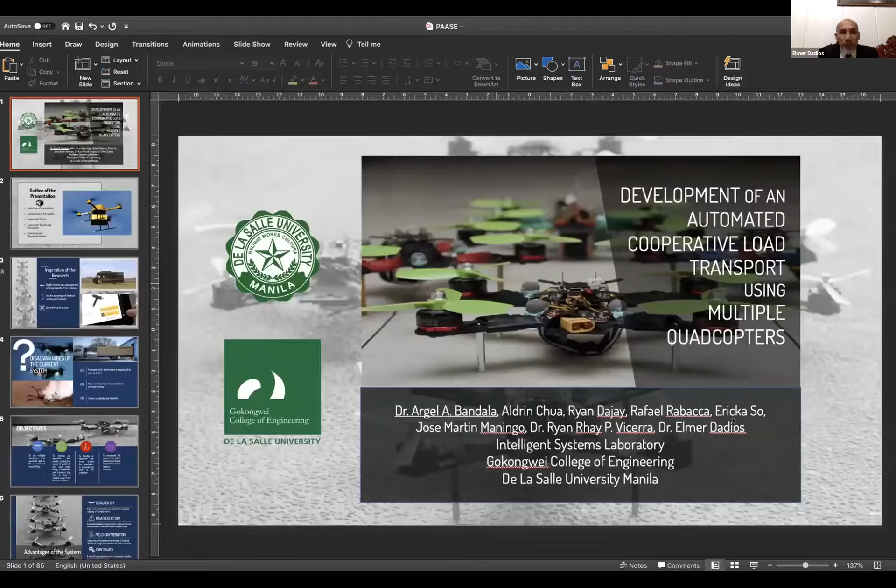On behalf of my co-authors and research team, Aldrin, Ryan, and Ericka, together with our co-faculty researchers, Engineer Maningo, Dr. Vicerra, and Dr. Dadios, I'm going to present our research entitled Development of an Automated Cooperative Load Transport using multiple quadcopters.

So here's the outline of the presentation. I'll be discussing the inspiration of our research, how we came up with this idea, the architecture of the system, the composition and design of the algorithm, experiment setups, experiment results, and how the algorithms performed. Then to end, I'm going to present some recommendations together with the conclusion.

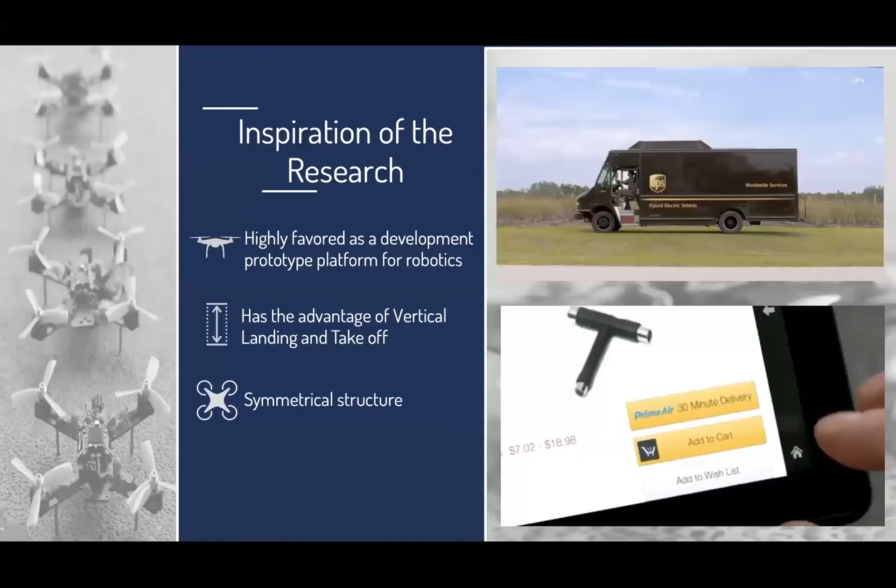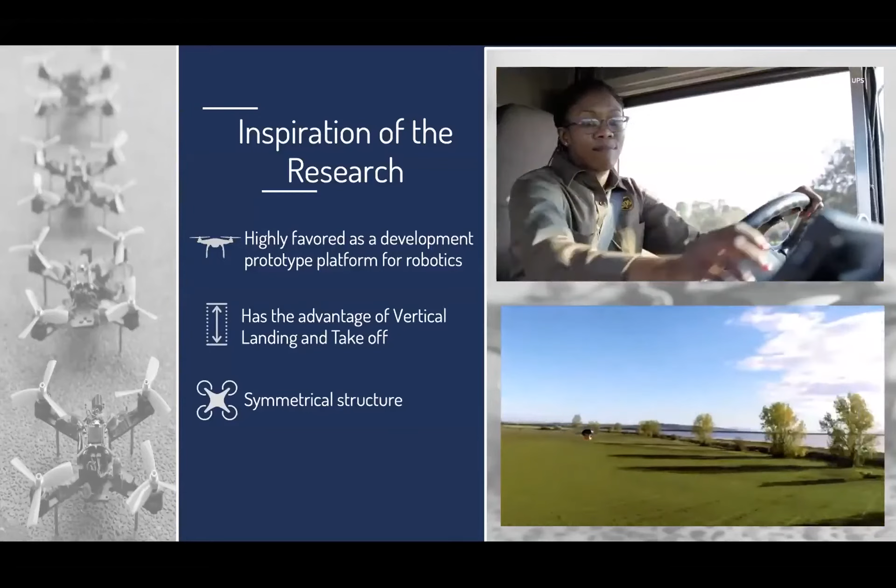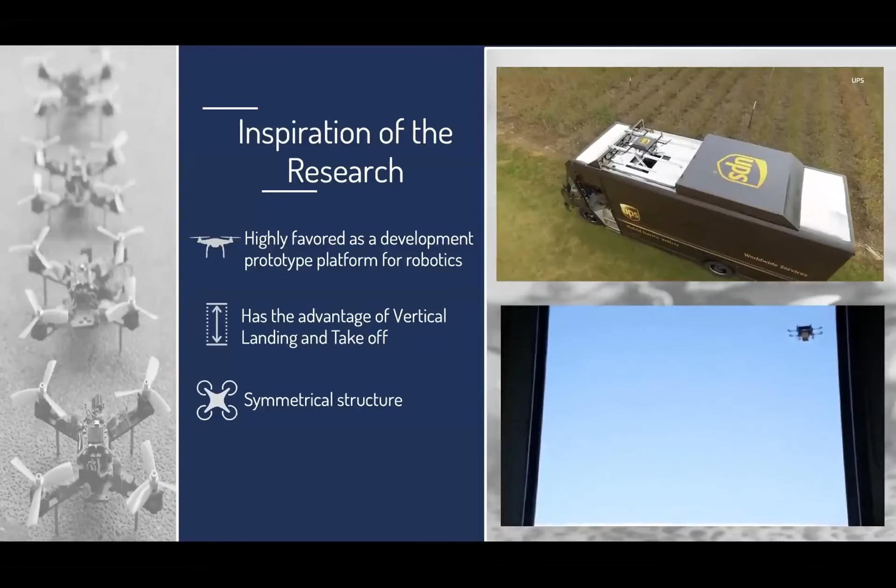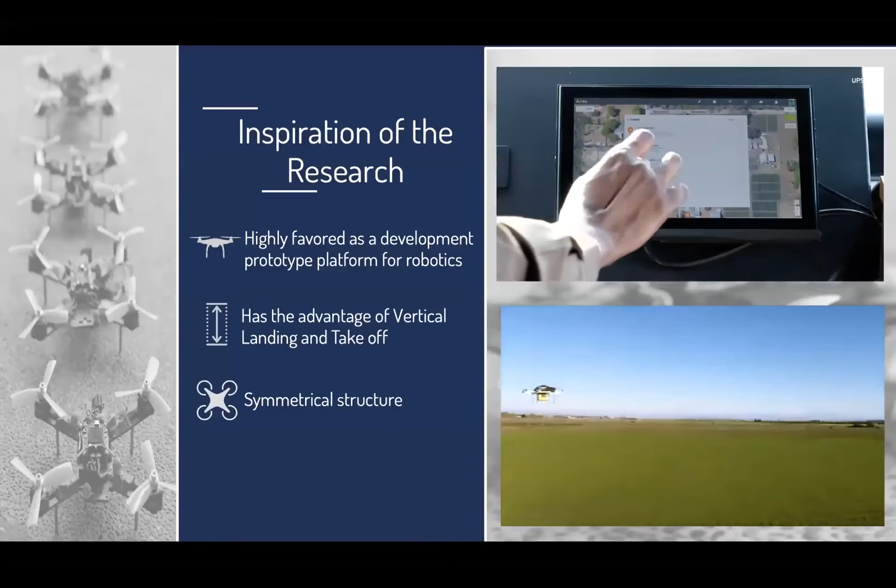So, of course, delivery using drones is gaining popularity, especially now that we are facing a pandemic scenario, wherein face-to-face delivery is of high risk, or the delivery personnel are at high risk of contracting the virus. So we actually developed a system which will enhance the current scenario in drone delivery. In Western countries, especially in the US and Europe, there are already existing technologies for autonomous drone delivery. That's the inspiration of our research. And of course, if we are using drones, virtually we can go anywhere without worrying about obstacles and other obstructions.

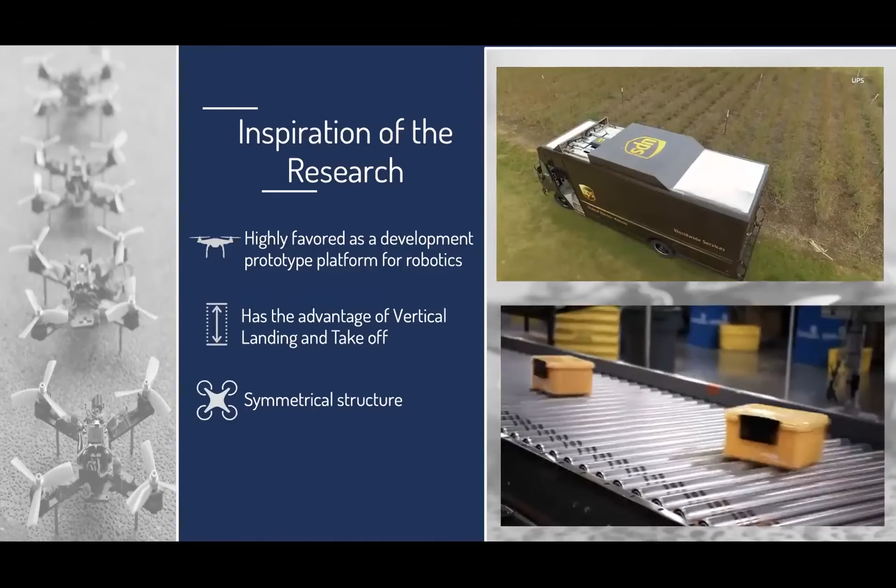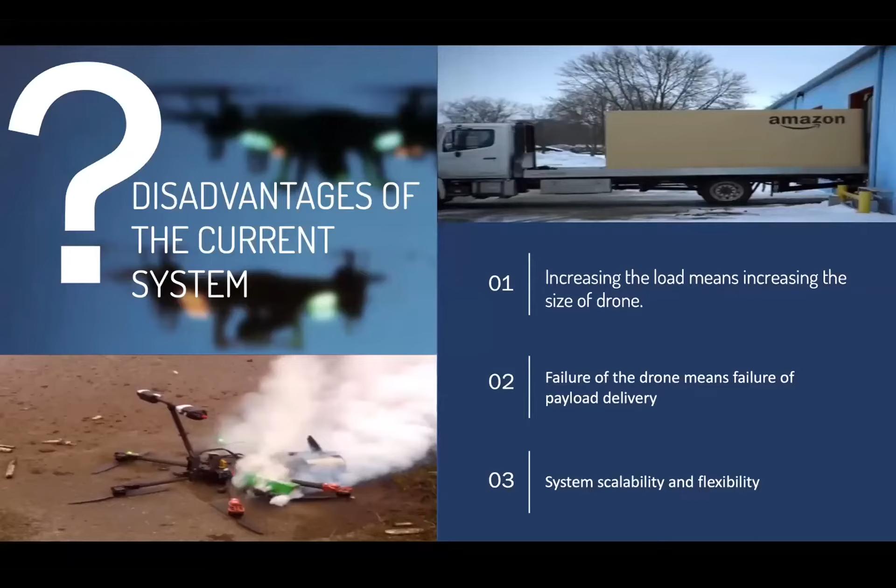So the research we accomplished primarily aims to explore the idea of using multiple drones instead of a single drone to accommodate varying loads. For this research, we have a small scale system that is not capable of lifting a 1 kilogram load, but by using multiple drones, we were able to lift more than 1 kilogram. We aim to develop an algorithm that would make all of these drones cooperate with one another, and of course, we need to detect the load and attach the drones autonomously to these packages.

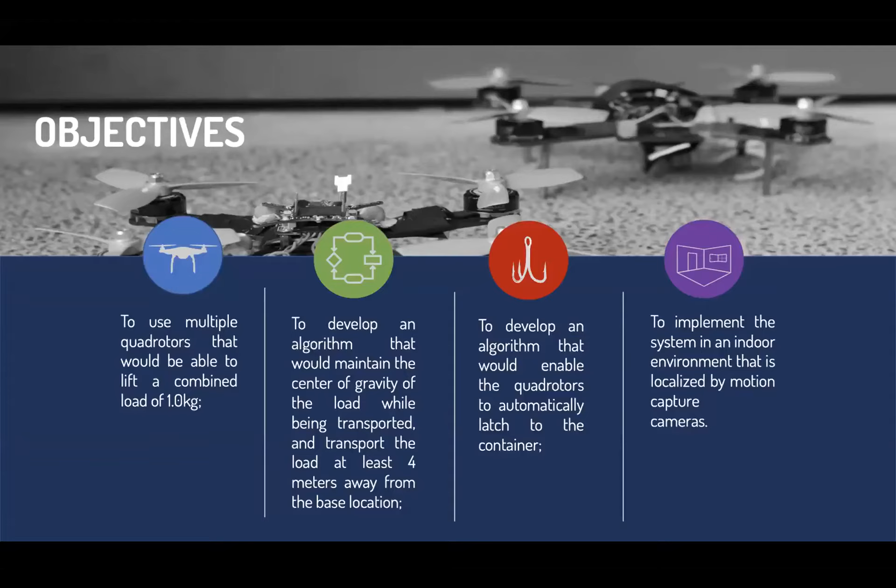And then, of course, to implement a localization system so that we will be able to have these drones work cooperatively. So what we are envisioning is to have this system perform these specific advantages. We are aiming to see that the advantage of scalability would address the problem of big loads and oversized loads. Then risk reduction—when a robot fails, the remaining robots would compensate for the loss. This also lets you introduce expansion, not by increasing the size of the drones, but by increasing the quantity and having them cooperatively transport a certain load. And of course, continuity—if a quadcopter fails, a replacement drone can rescue or continue the mission.

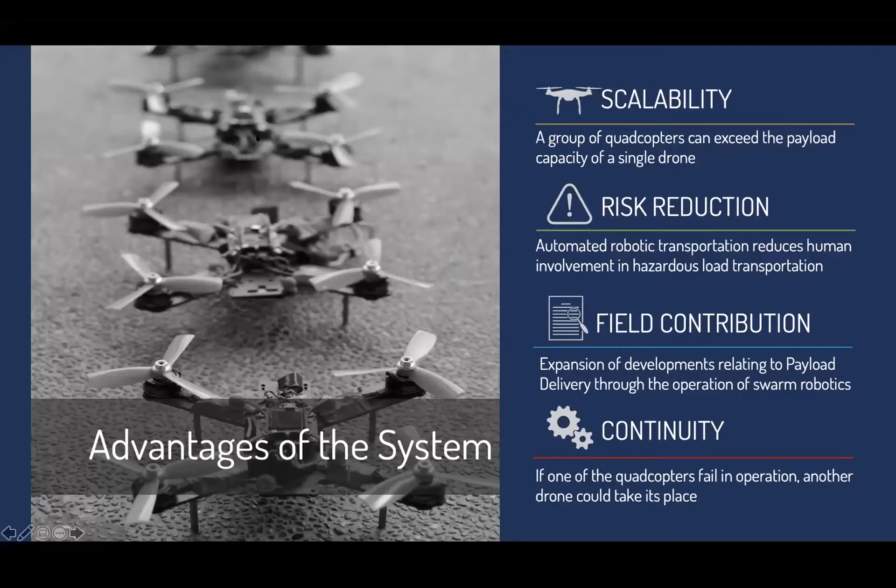So we surveyed several existing researches, but there are several areas that lack application and need to be improved. Basically, there are few researches on landing, stability, and knowledge on these platforms. For payload delivery, there are several existing researches, but only a few tackle cooperative load lift. So we are aiming to have an algorithm that would make this possible using multiple drones.

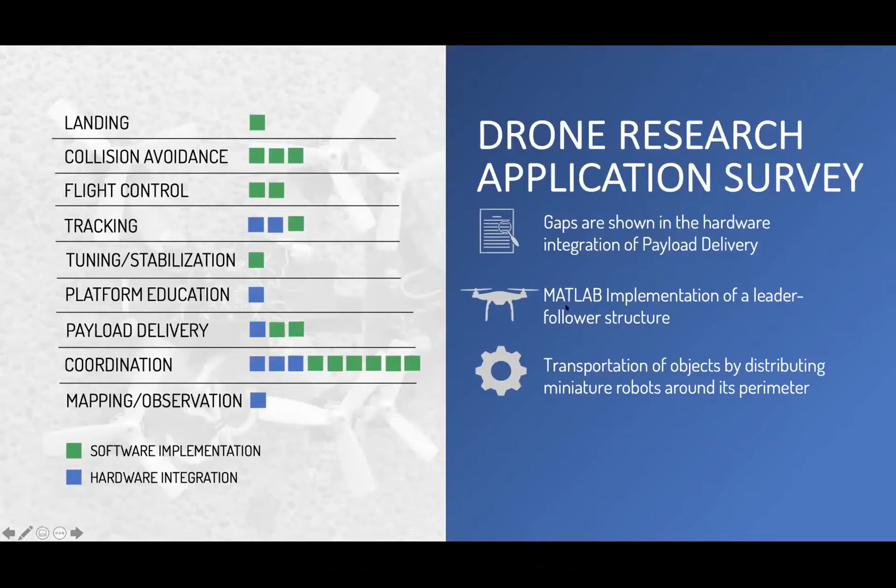So what are the considerations in our design? Of course, we need to locate the route as well as the origin and destination of the package. And then we are aiming to use a motion capture camera to perhaps mimic the function of GPS systems outdoor, to localize or locate the position of each drone in the 3D space.

The motion capture cameras will at least simulate or show how the algorithm performs in terms of positioning and trajectory execution. And then for the operation, since this is the first time we execute this kind of research, we are confined to indoor scenarios in our lab to at least show the feasibility of this idea.

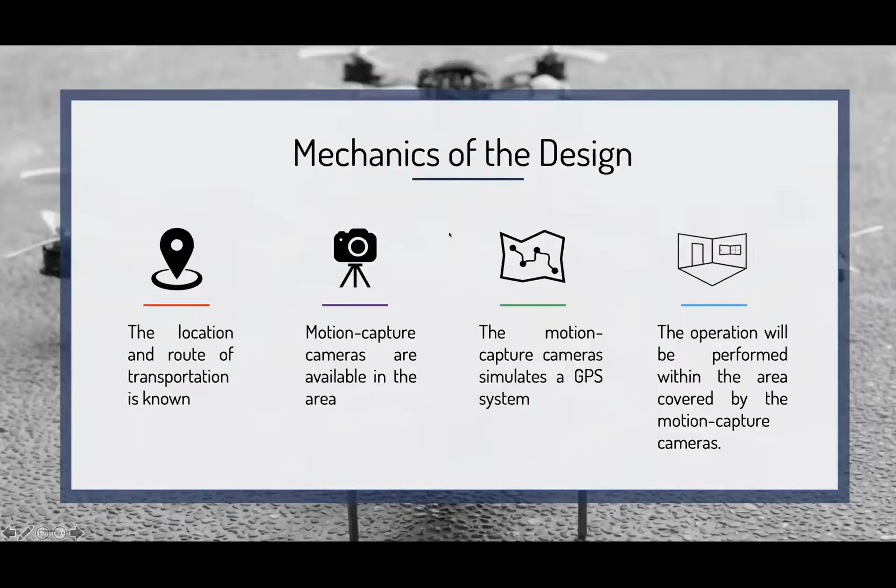Okay, so I'm going to present the flow chart and then how the drones are at least tailored fit for the application, and what is the setup of our testing experiment.

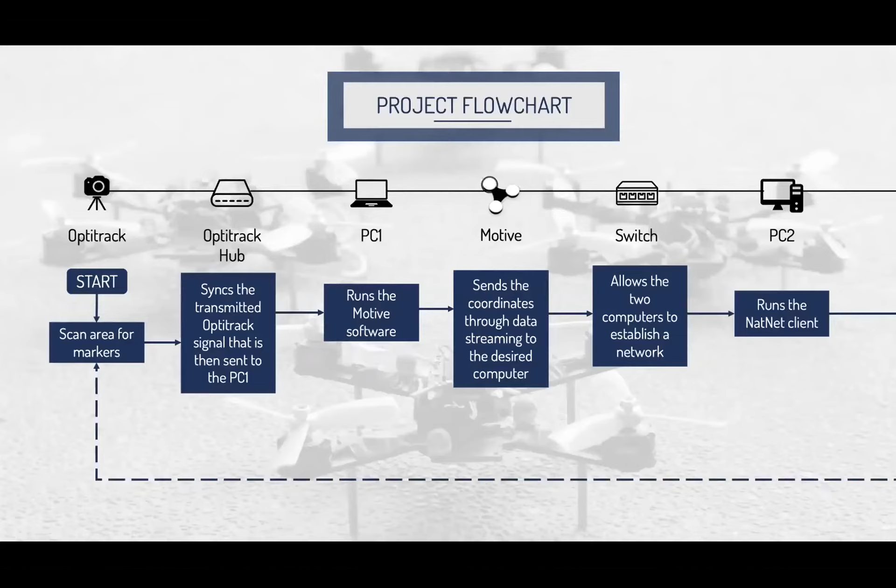So basically we have the localization, or the camera. We use OptiTrack. That's the first step, and then the positioning data will be transmitted to our computer, and a software called Motive would iterate the position of the drones in 3D space. Then our second computer would control the positioning as well as the trajectory generation of each drone.

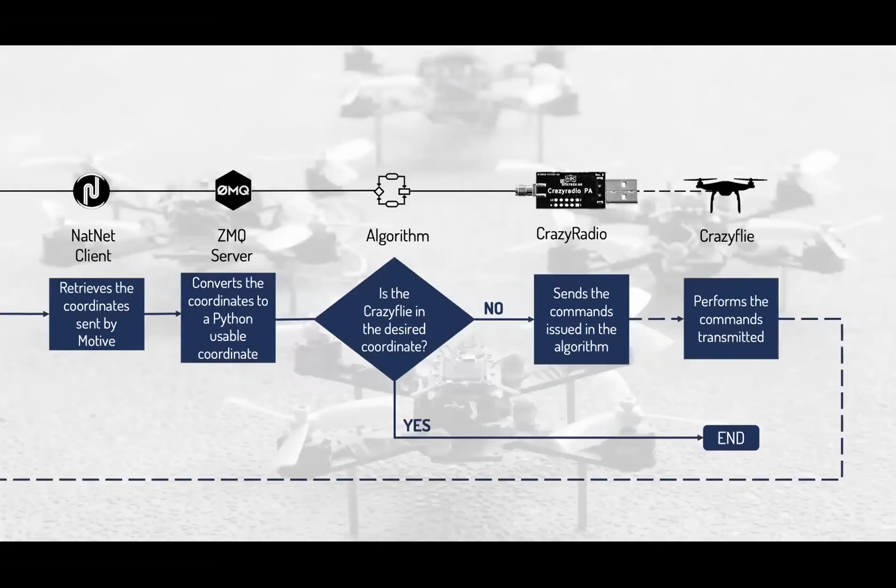So here is our remote testing room. We have an improvised lab for this research, which requires a lot of space. As you can see, we have our cameras here—we have 6 sets that would basically observe the robots and their positioning.

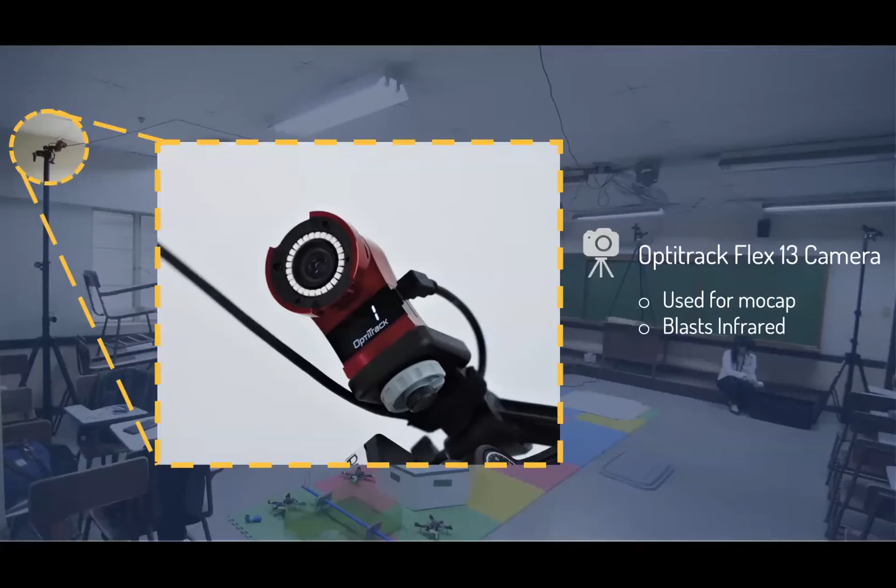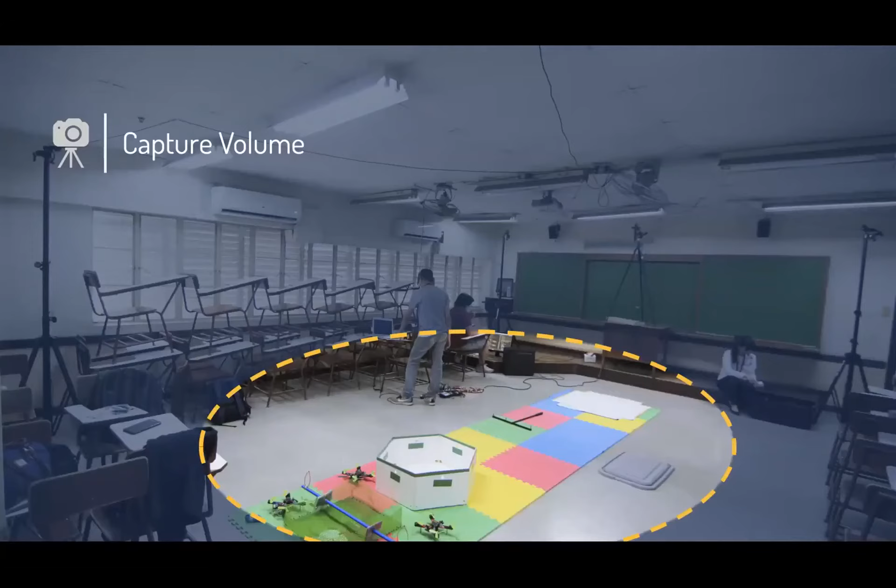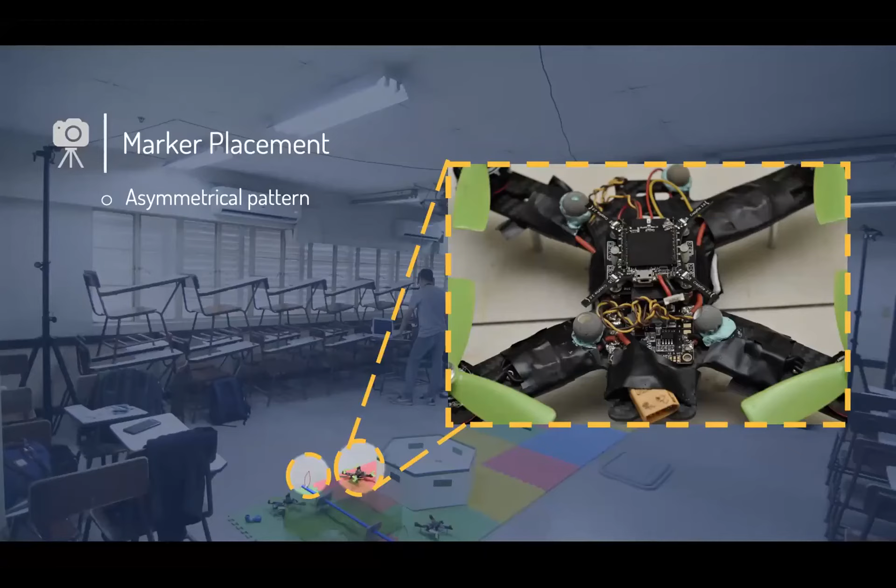The other 2 are on the other side. And this is our capture volume, or the 3D space, the operation area where the robots would execute the algorithm. From our previous research, we did previous algorithm testing, so we have here an open source drone, and we modified it to control a bigger drone with the green propellers, as you can see here.

And of course, here is the central station. So basically, all of the camera images or camera data will be fed to this hub, which converts the positioning data and transmits it to the computer.

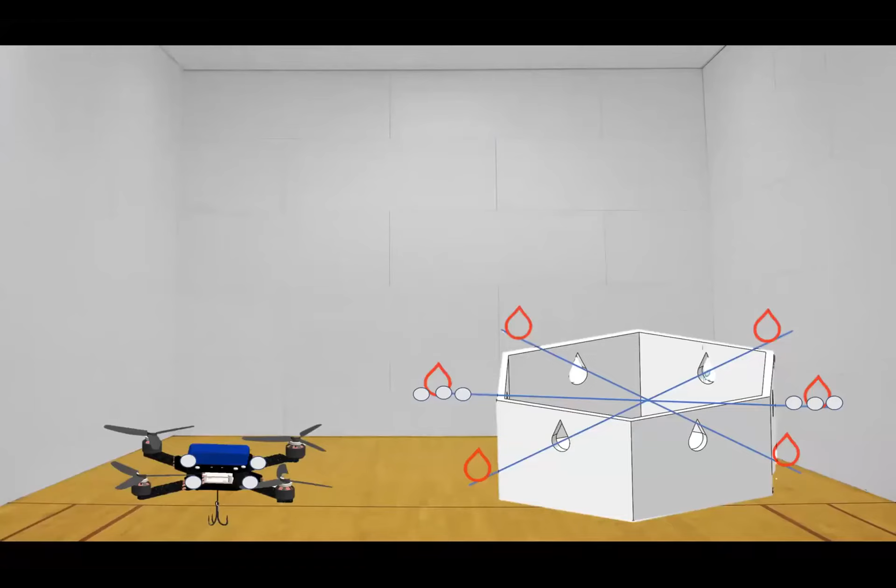In our software, the drone on the lower left is represented by this rigid body, and the attachment or placement of the hooks are placed in the circles on your right and in the middle. So basically, the drone would fly and attach itself to that position.

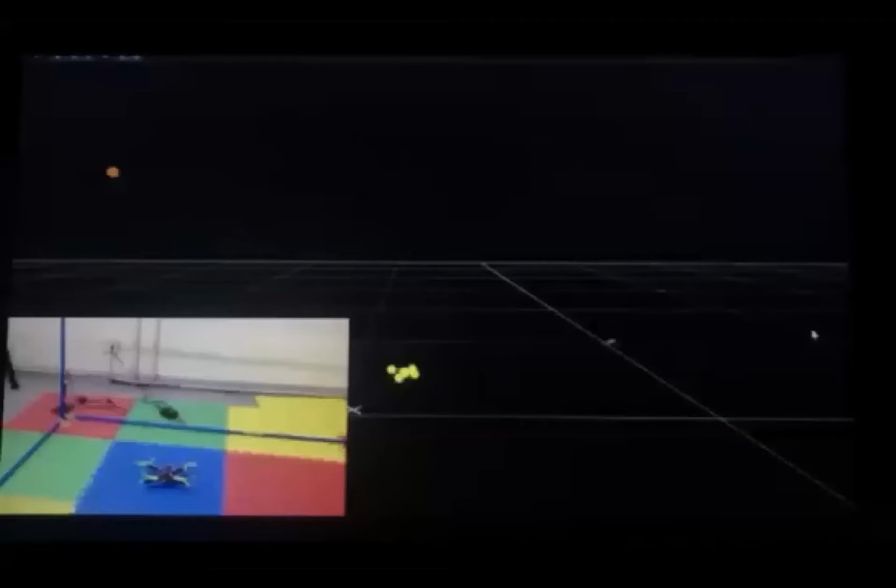So here we have our first test. Basically, the yellow circles are the representation of the drone in 3D space—well, at least in our algorithm.

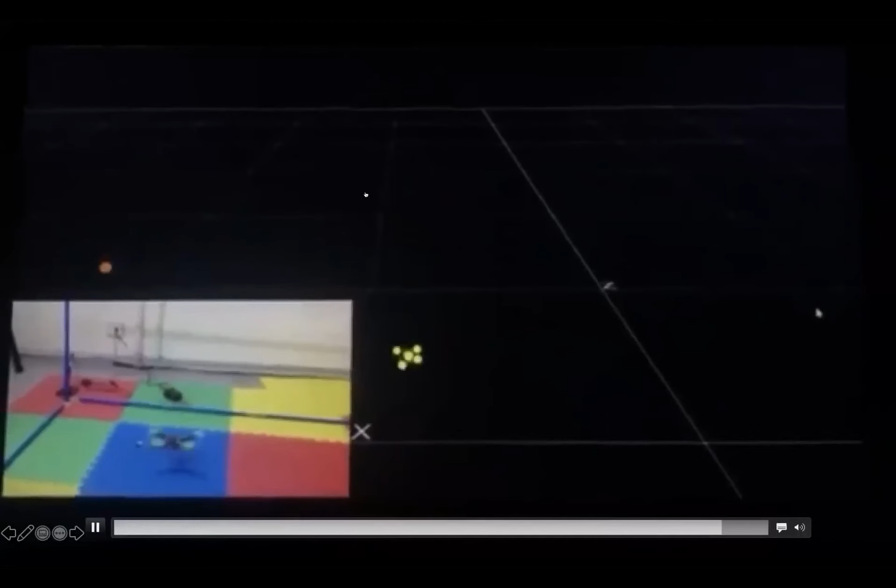So the idea is to have specific points that will serve as the attaching point, or the point of contact with the load and the drone.

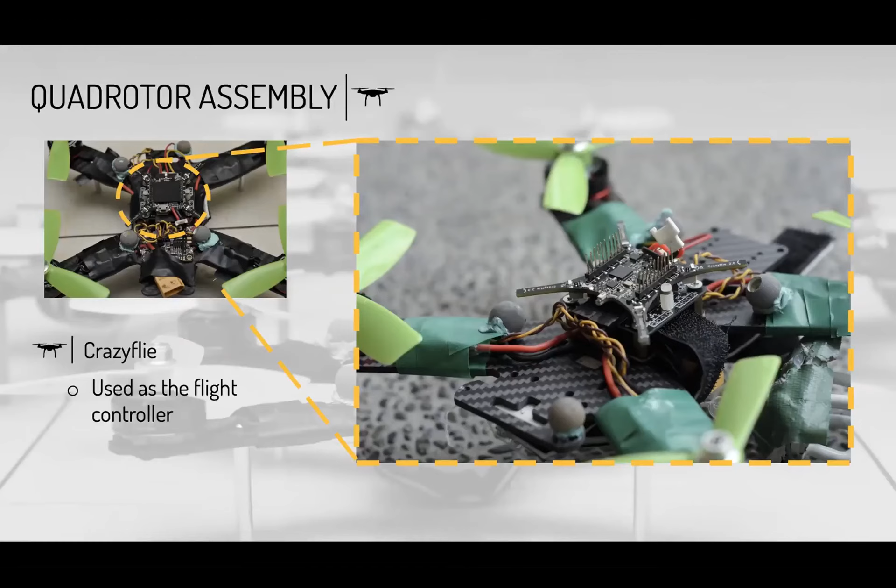So yeah, we use an open source drone that we worked on in previous research, so we are very knowledgeable about its functions. We have a converter that would use this drone to control a bigger drone. So here is the adapter and how it is laid out in the bigger drone.

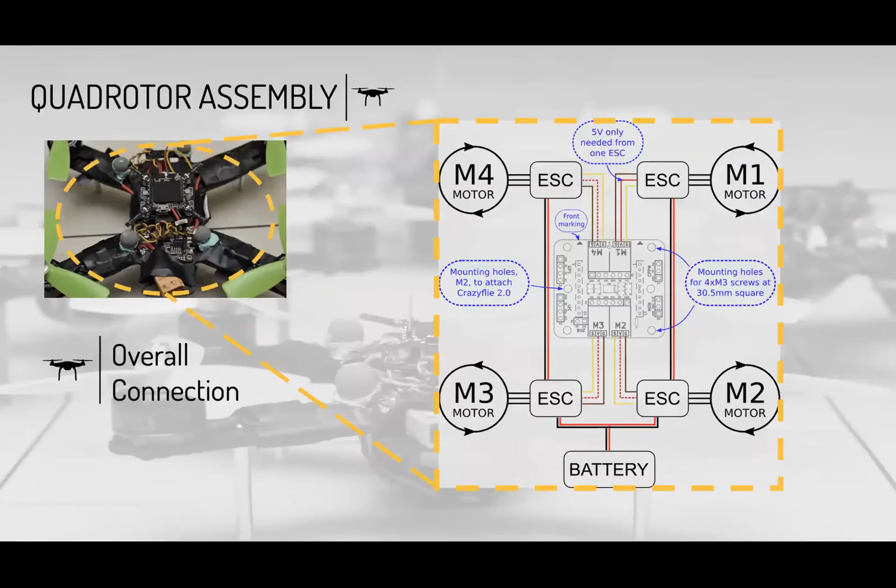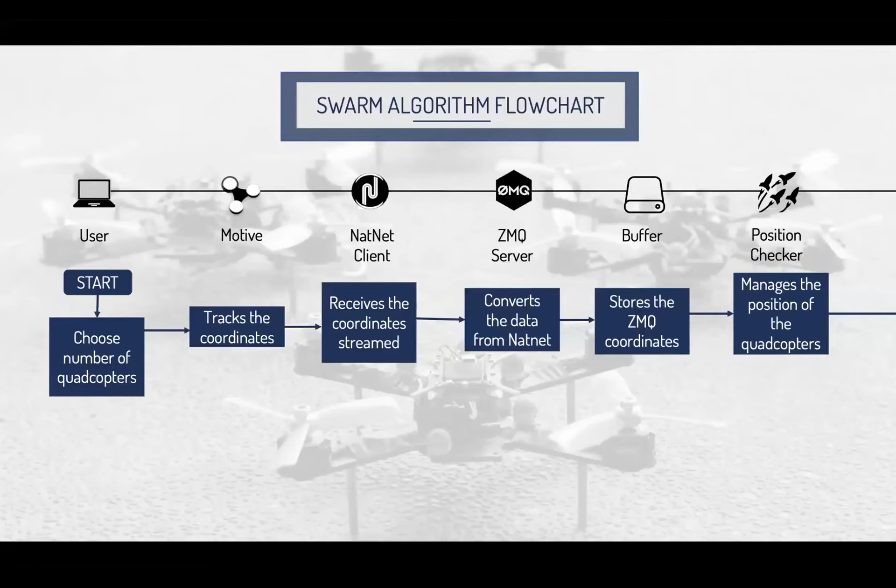So the algorithm flowchart would be: first, the position data will be fed into our computer, and a software called Motive and NatNet would convert this data into position information. Then a ZMQ server would convert the information so that it's ready for processing by our controller for the drones.

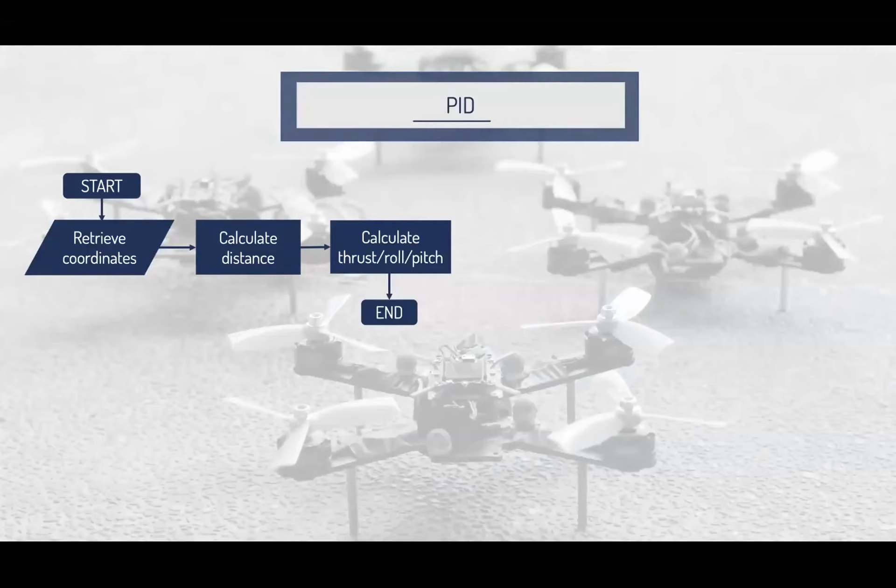So we utilize a basic PID controller for processing the coordinates and orientation of the drones for movement and trajectory planning. I will skip the math.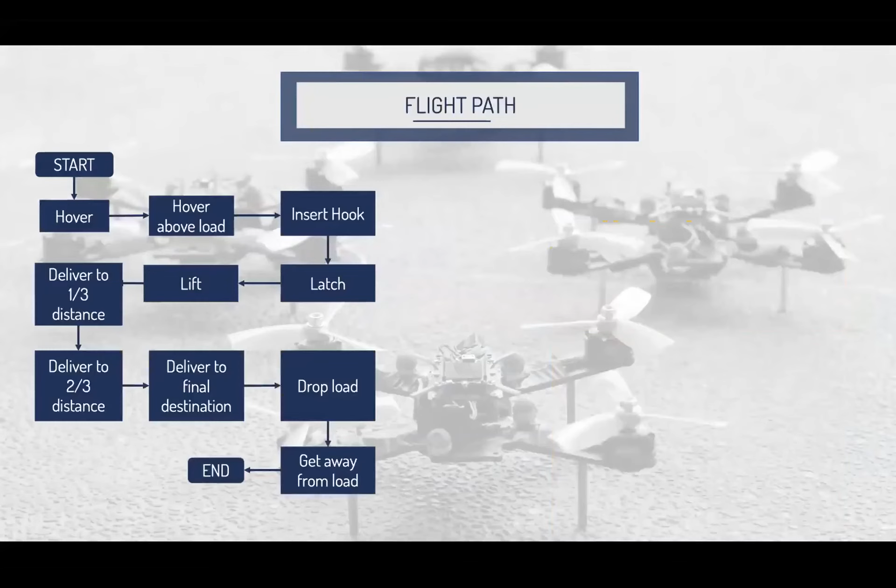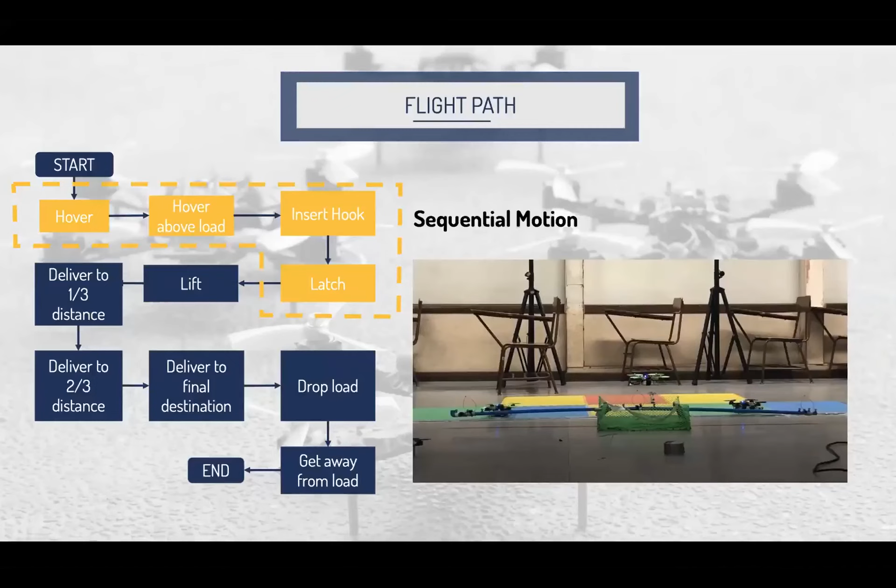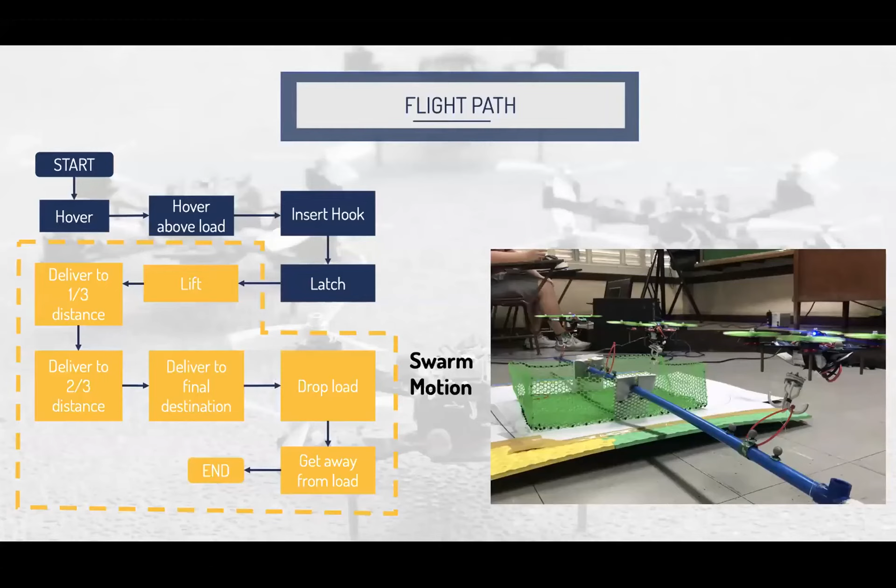So basically, the first step would be operating the drone into a hover mode, and then inserting the hook or latching itself into the load. Then, of course, the final step would be execution of the trajectory as well as transport of the load.

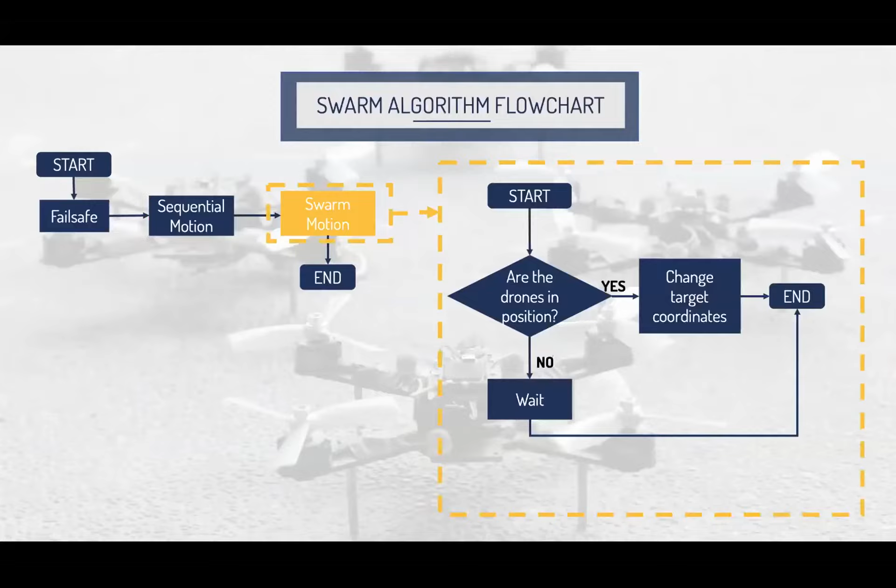So for position checking, we utilize this algorithm, so I will not discuss it in detail. Let me show you how we tested the system.

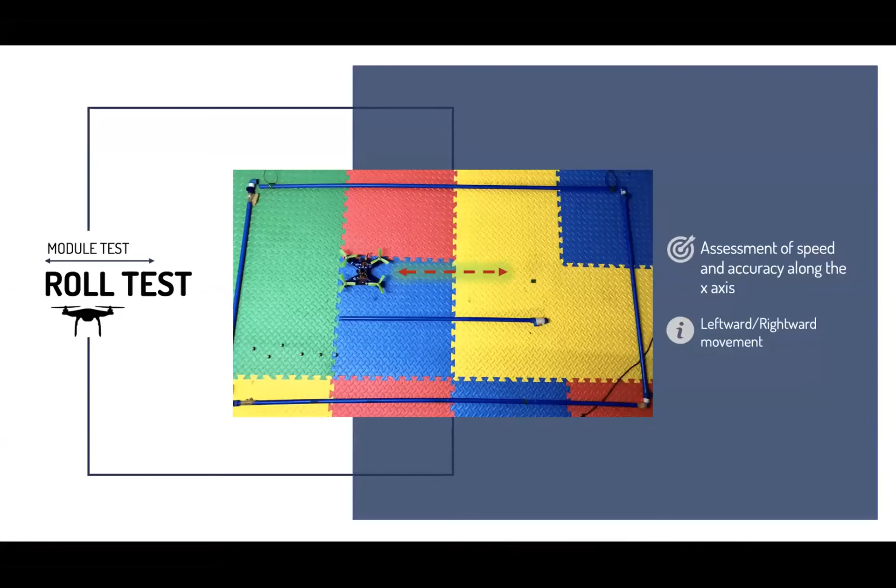So basically, we measured the orientation—that's the pitch, roll, and thrust—as well as the 3D positioning of the drones. First would be the roll test, which is the sideways movement of the robot from left to right. So here are the data that we collected.

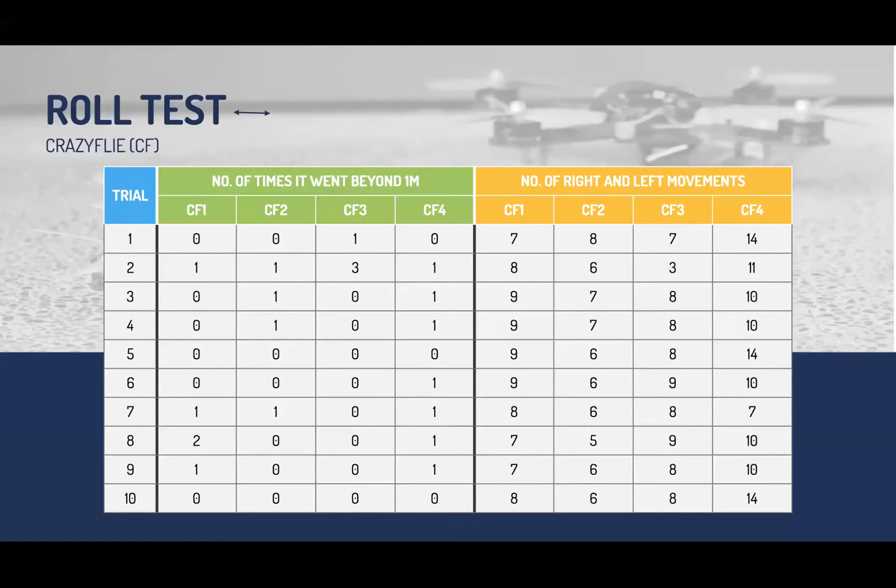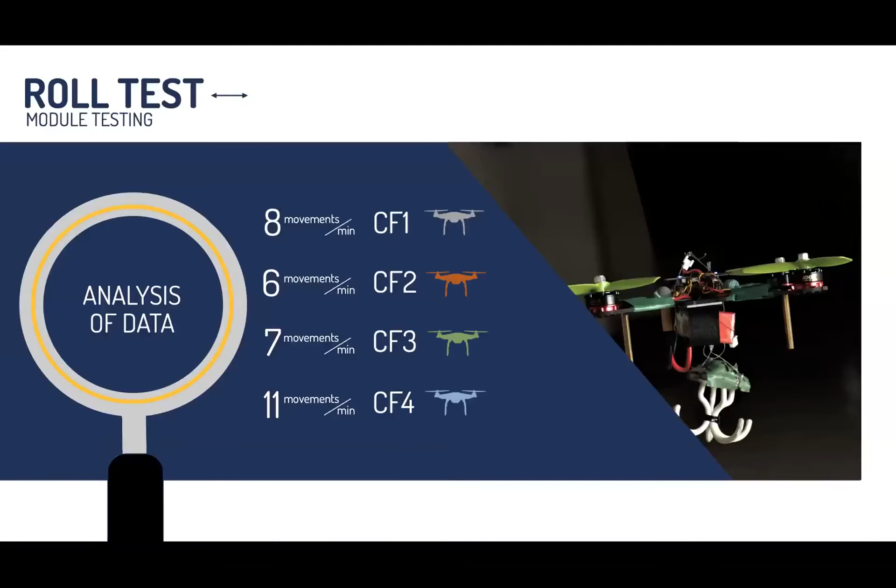So basically, we have tolerance for the position, and the green columns represent how many times the robot crossed the boundaries, and the yellow column represents the units of movement. So we summarize it as movements in units per minute, and here we have the graph of the movement.

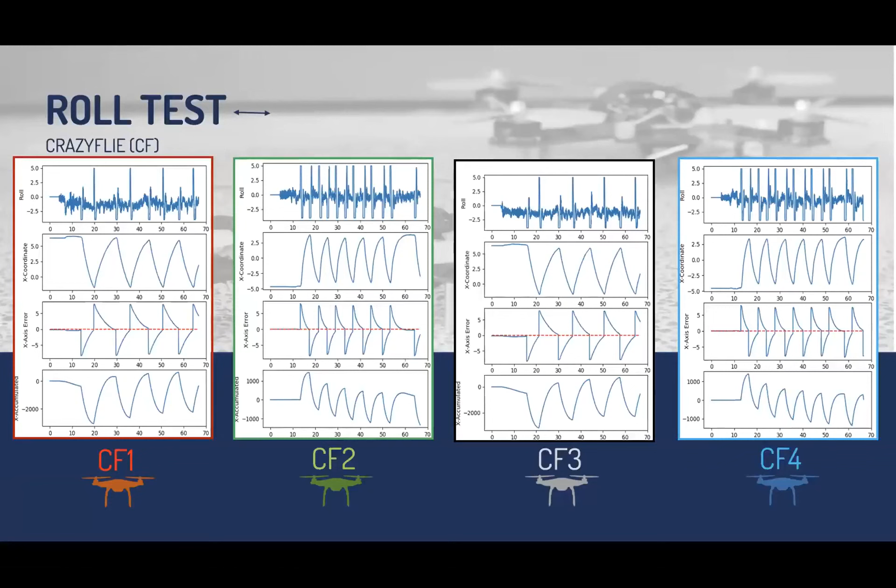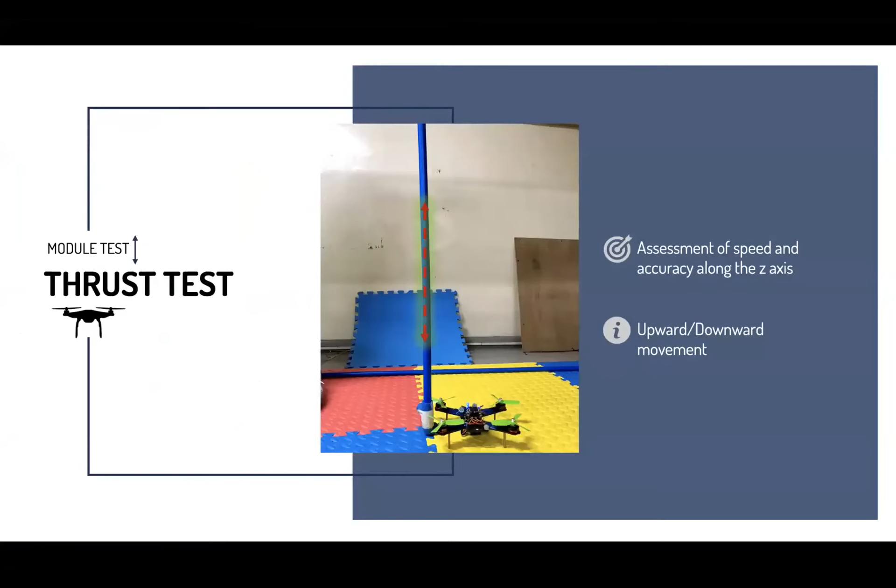For the thrust or the altitude, we measured it the same way. So here are our results, and this is the graph of the altitude.

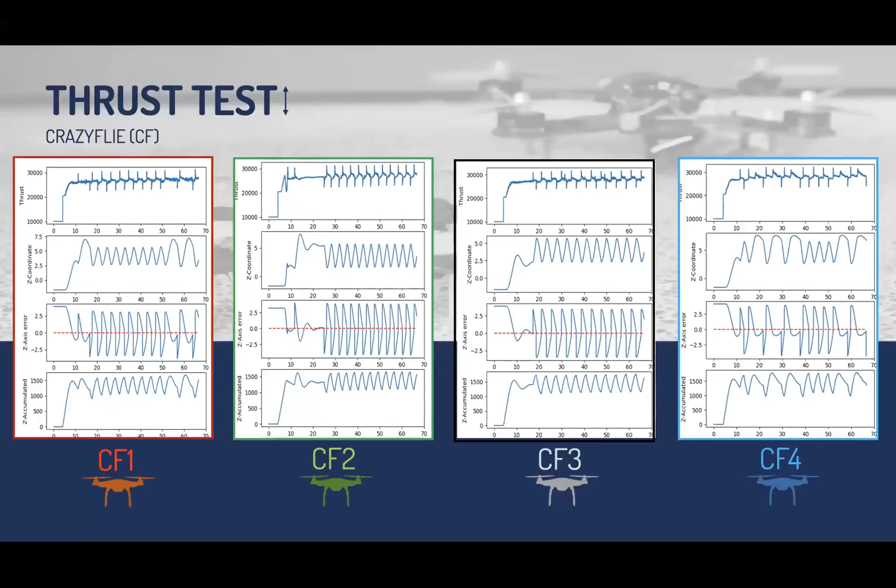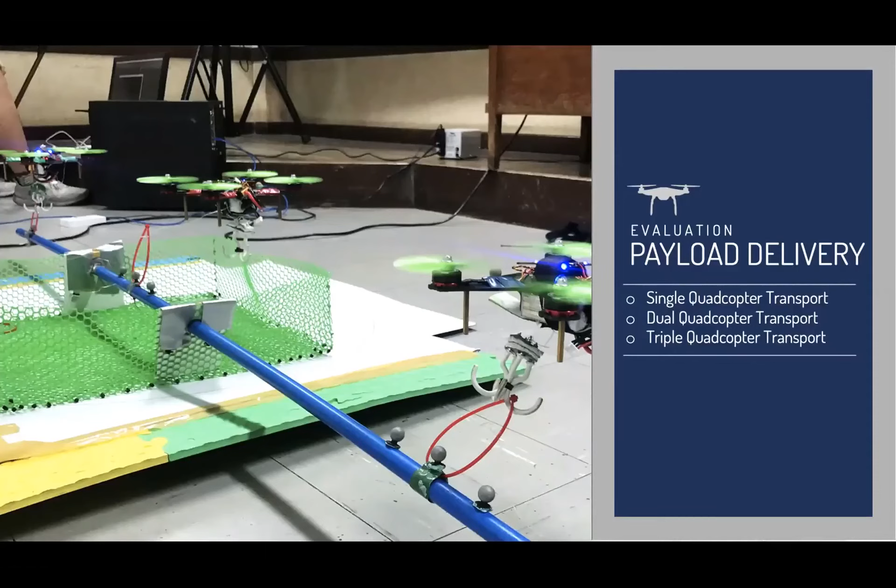So for the delivery test, the idea is to have a scalable system. We start with a single drone, and it will attach itself to the load, measuring the weight by measuring the altitude or thrust it generates before a change in height is observed. Basically, the drone individually tests whether it can lift the load. If the maximum allowable thrust is reached and there is no change in altitude, it will send a message to another drone telling it that the first drone needs support or help, and then the process is done in a loop.

So we actually tested up to 3 drones. We tried 4 drones, but the space was not enough. So we proved that we can do at least up to 3, and we are capable of increasing the number of drones.

For the single drone test, we have a single load, and we intended for this drone to transport the load from one point to another, then latch itself to lift the load and attach to the load. We had 80% success, meaning we had a target position, and 80% of the time the load landed inside that target position.

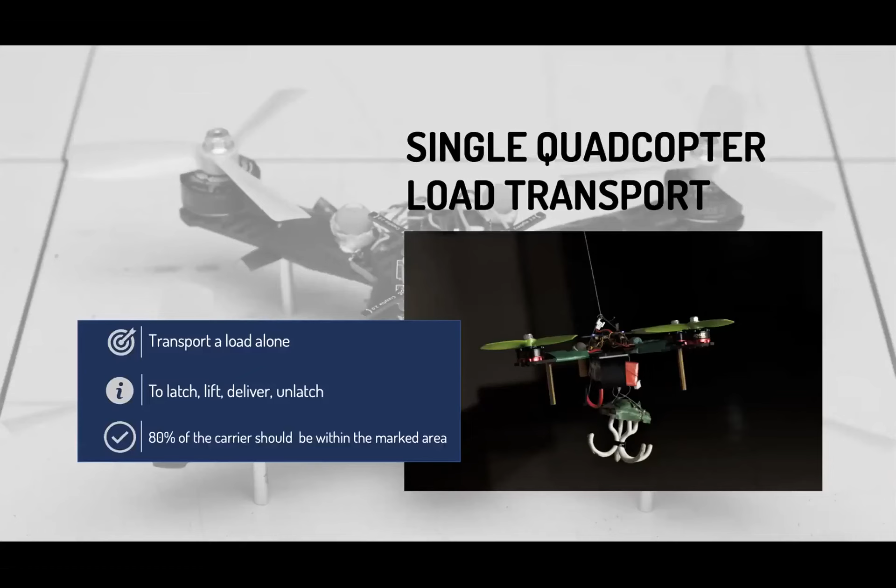So we measure the time of unlatching, total time, transport time, and the drop accuracy, or the exactness of dropping the load.

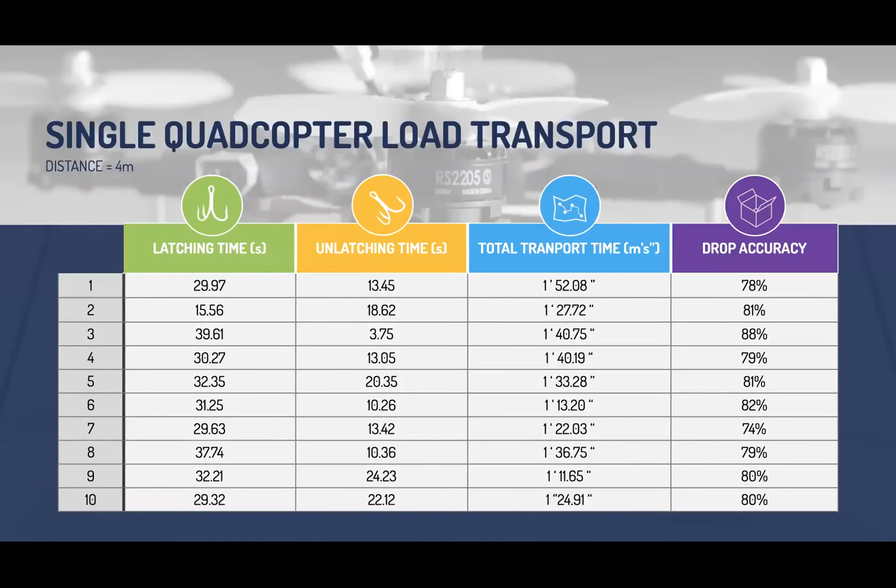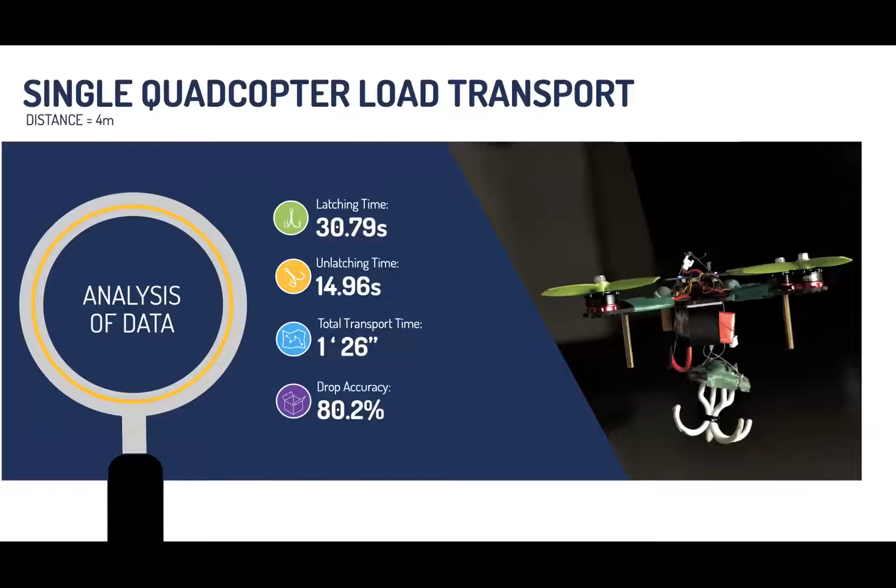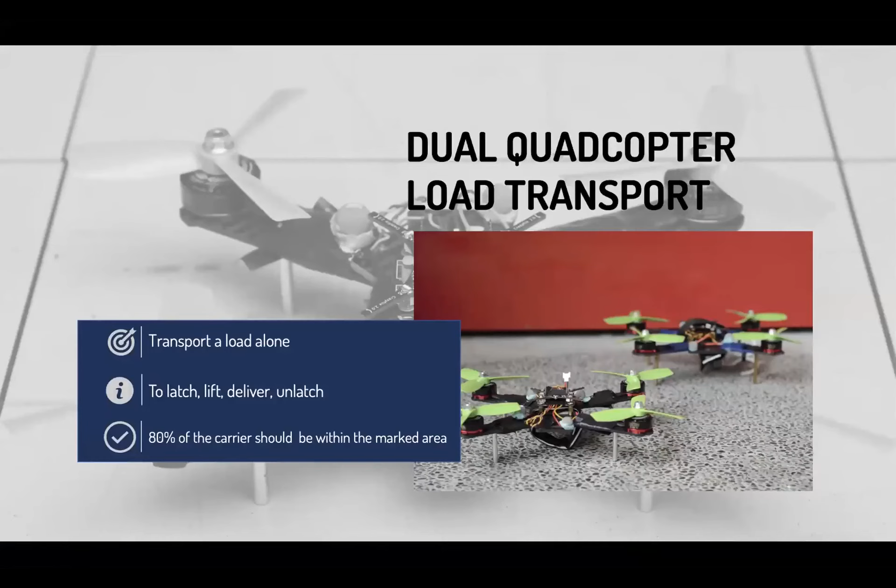The same test is done for 2 drones. So here's the result, and here's the summary.

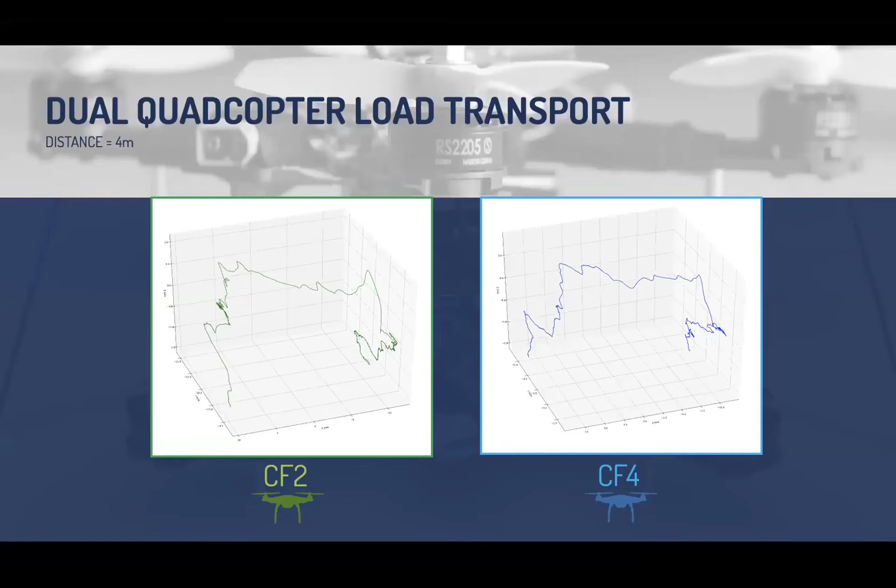We actually gathered separate trajectory data. The actual position, if you observe, shows a difference of certain distance from one another. That is actually the distance between the latching points.

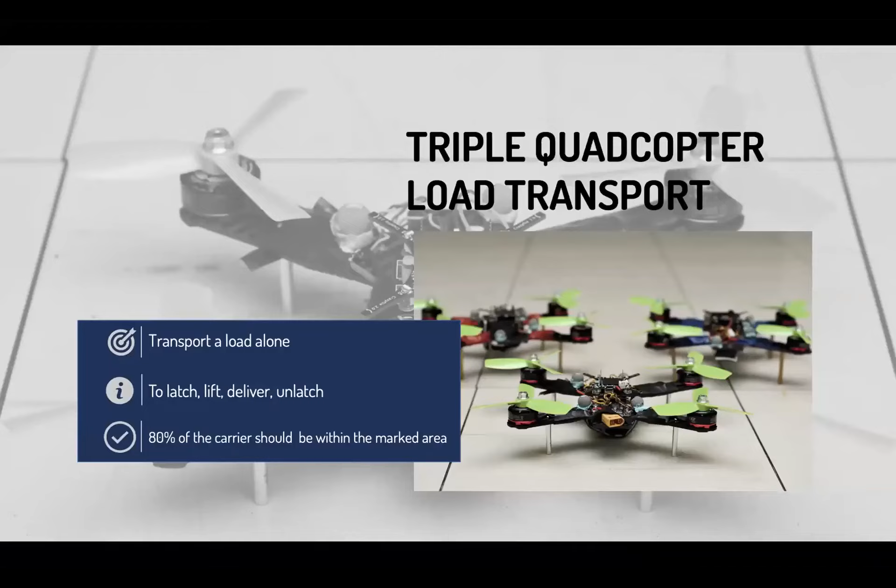And for the three robot or three drone setup, we've done the same. So here's the result. We observed that increasing the number of drones would actually increase the accuracy of the drop.

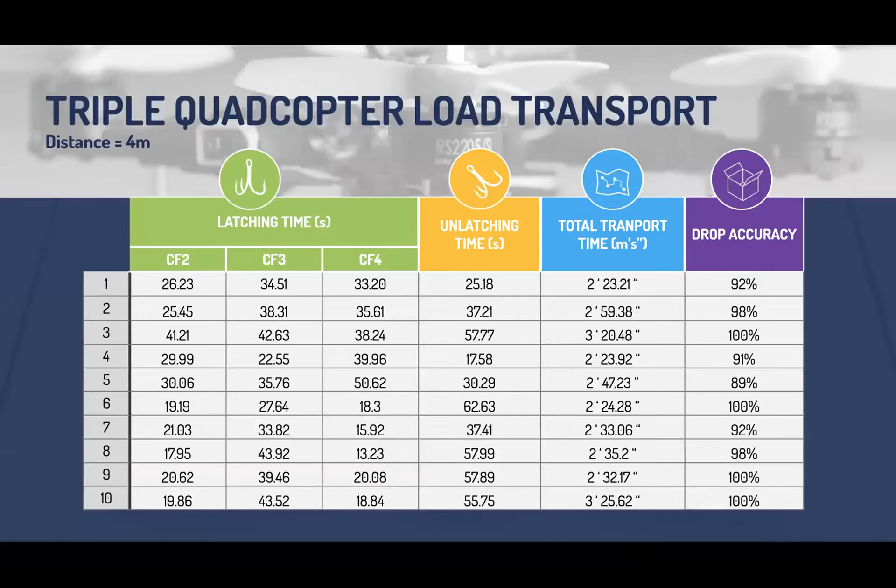If you can see, our drop accuracy is around or more than 90%. Here is the summary of the movement and time, and this is the actual trajectory that the drones made for a three-drone transport.

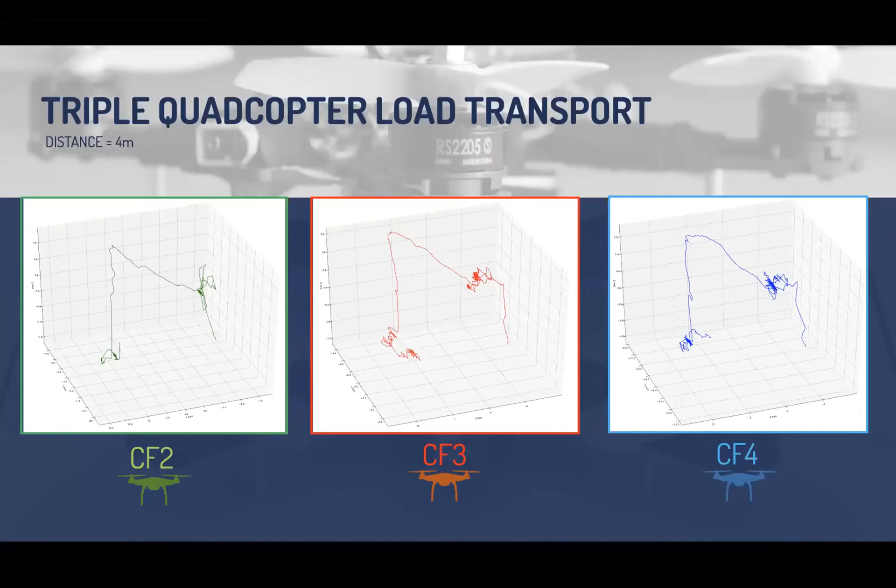As a conclusion, we successfully tracked and directed the route of drones through motion capture cameras. We automated the control of drones to different destinations from one point to another. And augmentation of the latching process using magnets and a hook was implemented.

The latching and unlatching process took less than a minute, and the drones performed balancing lift. Basically, each drone compensates for the errors in movement of the other. In total, they have a balanced lift of the load.

And of course, we have around 80 to 85% delivery accuracy. Basically, a certain target area is drawn, and we measured whether the load landed inside that area or not. And as mentioned earlier, there's improved accuracy with increasing the number of drones.

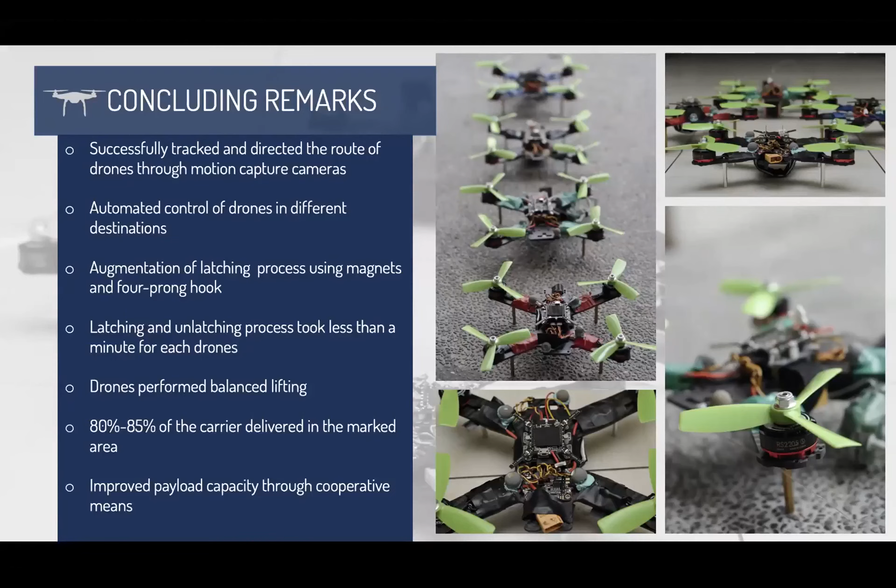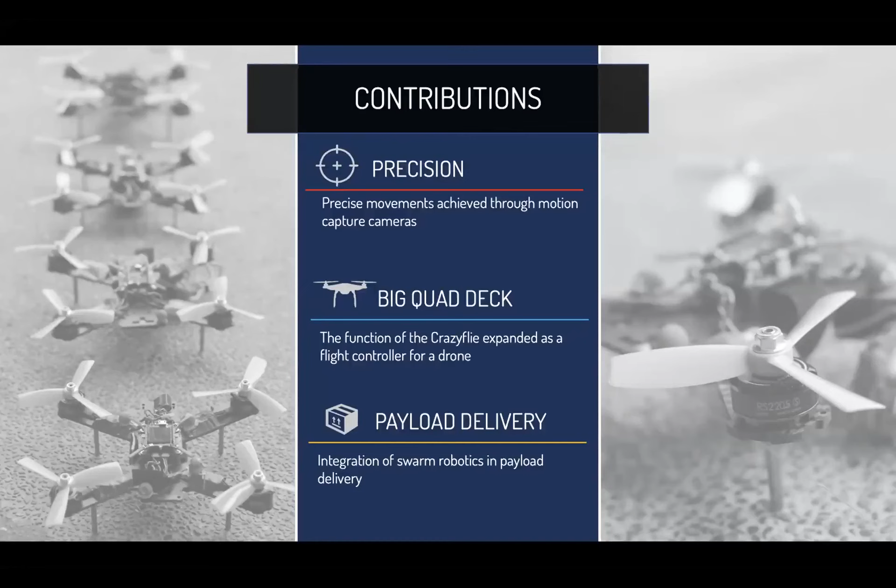Some of our contributions would include: we displayed precision in movement using motion capture cameras, and the ability of the small drone to control a bigger drone using the facility of the open source robot was displayed. We also demonstrated integration of swarm technology in delivery of payload.

Some of the recommendations we've seen throughout the course of the research include improvement needed in hover stability, or load transport stability, when implementing it in outdoor scenarios. So we have an ongoing research on payload stability algorithm development for this application.

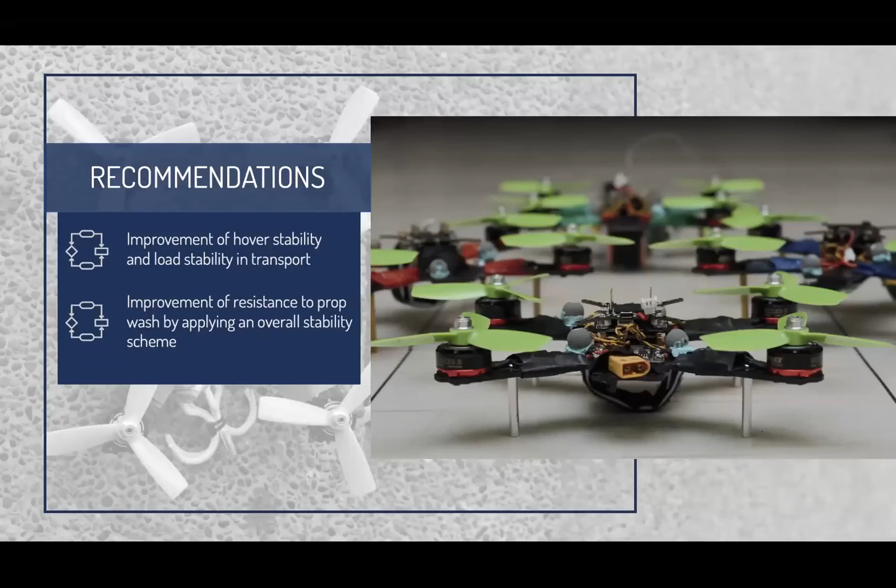And of course, we need to improve the resistance of each drone to propeller wash. This is related to our first recommendation, regarding stability and resilience against external forces.

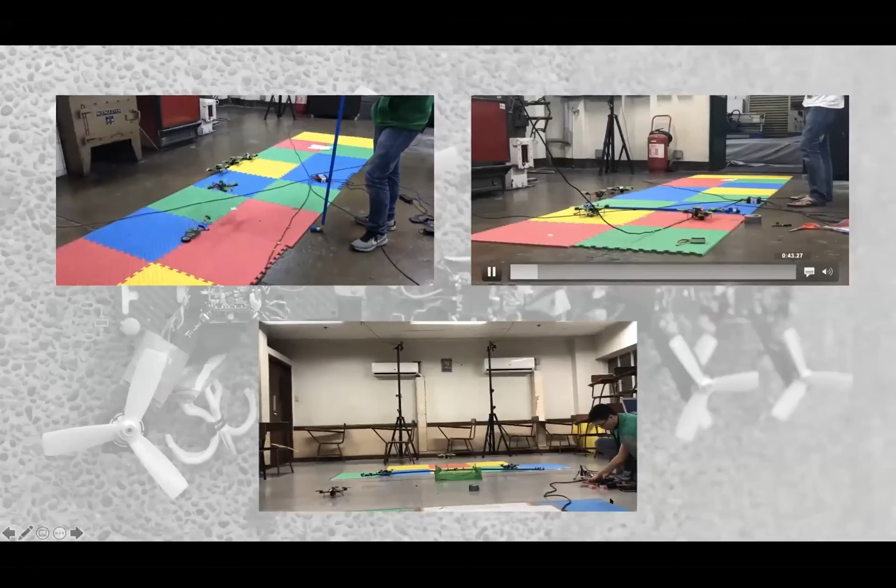So I have here a video demonstration of our research.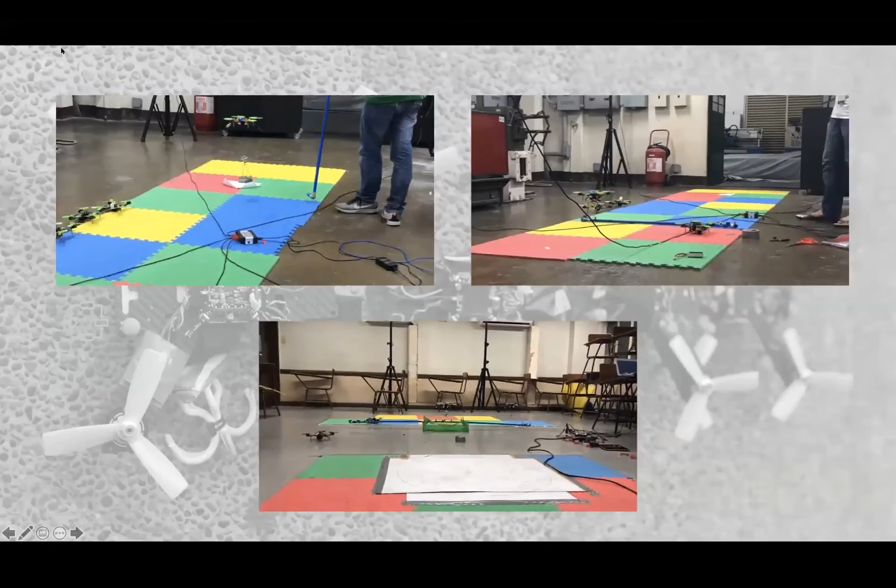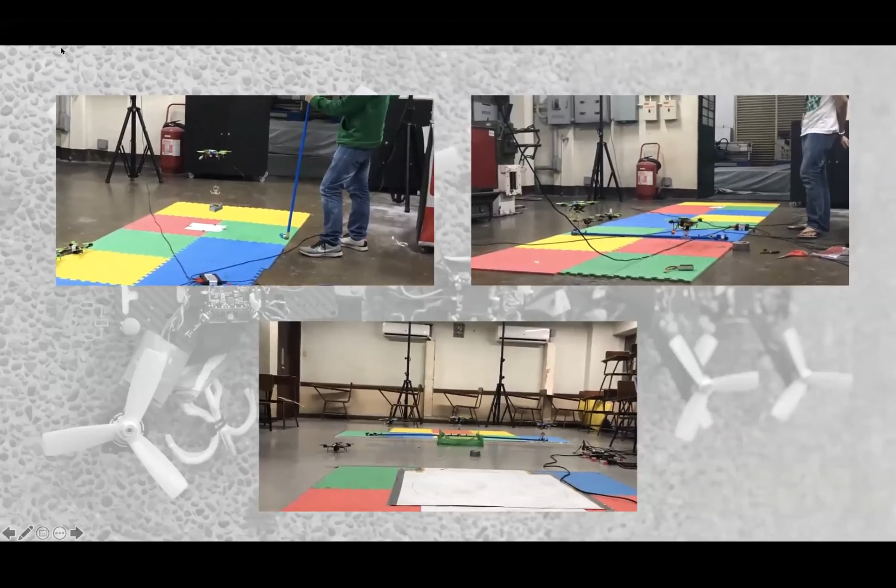On the upper left, you have a single drone transport. As you can see, the load tends to swing, and that actually contributes to the error.

On the upper right, we have a two-drone transport, and at the bottom we have a three-drone transport test.